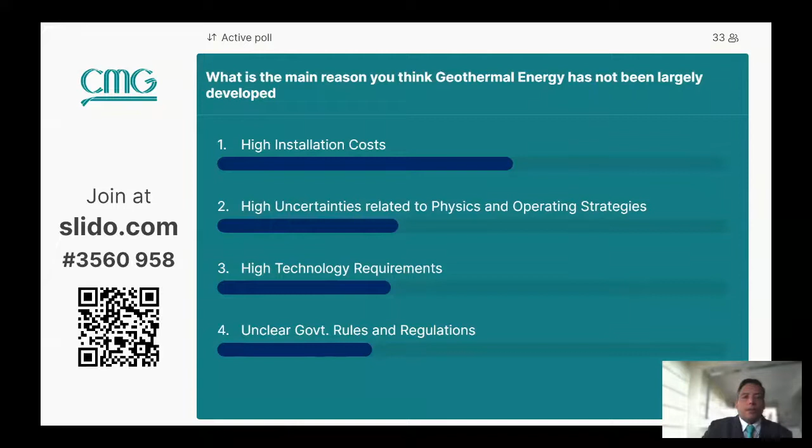Let's start this presentation by telling the story of a growing renewable energy industry. Energy consumption is by far the biggest source of human-caused greenhouse gas emissions, responsible for at least 76% of worldwide emissions. Within the energy sector, heat and electricity generation alone is responsible for at least 32% of these emissions. Carbon capture and storage has been largely implemented in many projects in the US, Europe, and Canada, but this process is about disposing of CO2 already in the atmosphere, and we need to stop producing CO2. For that, we need to further implement renewable energies to reduce dependence on fossil fuel.

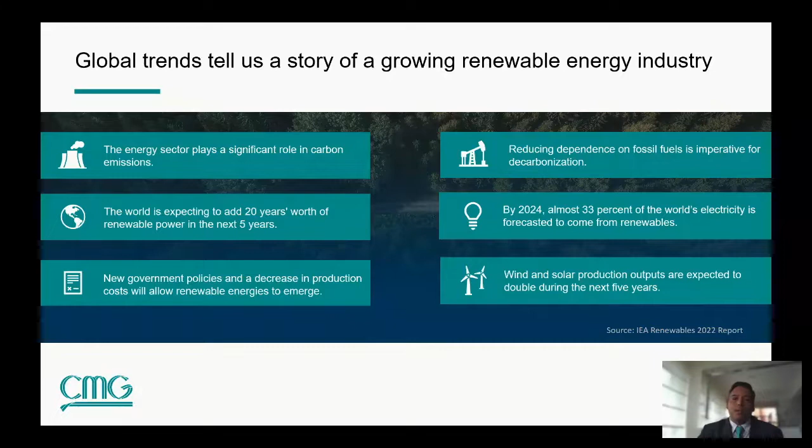The director of the International Energy Agency stated that the world is set to add much more renewable power in the next 5 years than it did in the last 20 years. Some experts even predict that by 2024, almost 33% of the world's electricity is forecast to come from renewable energies. Due to the pressure of decarbonization, governments seem to be changing policies, and this, added to the significant decrease in production costs, shows a clear driving force for renewable energies to emerge. An international agency report titled Renewables 2022 examined energy resources around the globe and found that wind and solar production outputs are expected to double during the next 5 years.

In 2022, geothermal added much lower power than expected from previous years. If you compare the amount of money invested in geothermal to other renewable energies, geothermal received around 10 billion US dollars, while solar and wind energy each received over 130 billion. So the question arises: why hasn't geothermal energy been developed?

Some experts compare geothermal nowadays with cell phones back in the 1990s. They were big, expensive, and only a few people could afford one. But things have changed, and we think this will be the case for geothermal energy as well. Each year, only in the US, geothermal electricity offsets the emission of around 4.1 million tons of CO2 in the atmosphere.

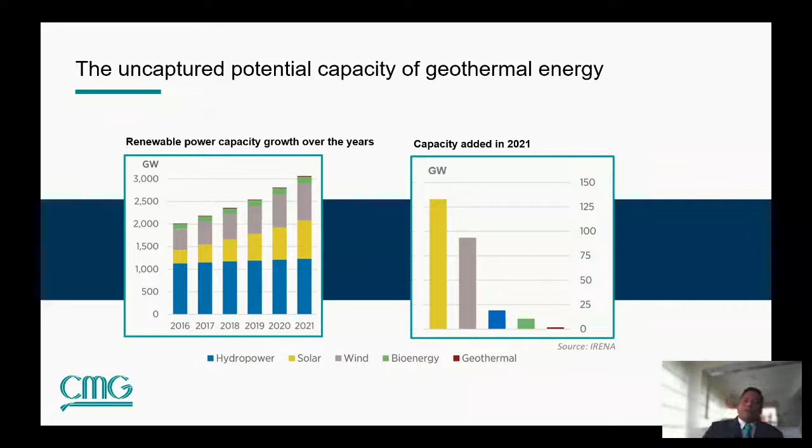So I think it's about time to talk about the agenda of today's webinar. We're going to start with an introduction to geothermal energy. Then we'll show you some specialized geothermal examples we've done in the last year. We'll show you how easy it is to create a basic geothermal case, and to end up, we'll talk about conclusions.

So let's start with what is geothermal. Geothermal is a type of renewable energy taken from the Earth's core. It comes from the heat generated during the original formation of the planet and the radioactive decay of materials. This thermal energy is naturally occurring and is infinite, as we say.

The mantle of rock is named magma, and in some spots the magma can come close to the surface near the crust. This typically happens near tectonic boundaries, which are the areas where most volcanoes and earthquakes are most likely to happen. We'll discuss this a bit further later on.

When the magma comes toward the crust, the rock and water absorb the heat, creating geothermal reservoirs. In some areas of the world, this heat can be produced, meaning it can be extracted from the rock and water.

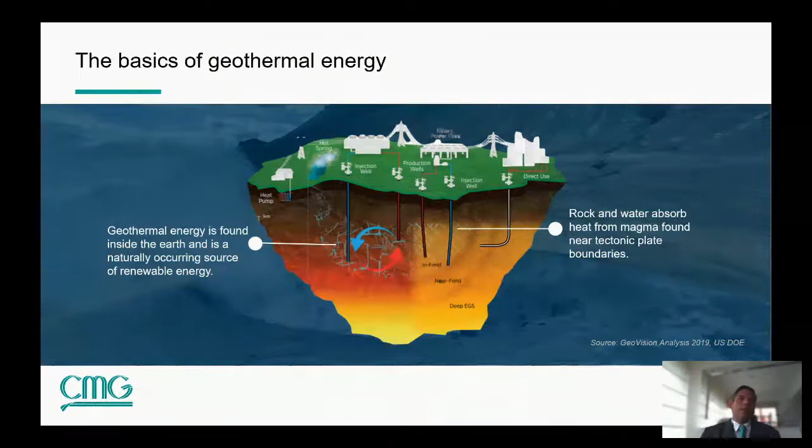Some studies ascertain that the energy present in the upper 10 kilometers of the Earth's crust is basically sufficient to provide global energy for approximately 200 million years. This is the energy needed for our entire civilization.

The technological advances of geothermal plants might take us to a point where we'll be able to put geothermal plants everywhere. But in this case, the Earth is in a constant state of change.

The Earth's crust consists of 15 to 20 tectonic plates, and the lines can be seen in this picture taken from the National Ocean Service. These plates can be thought of as pieces of cracked shell that rest in the hot molten rock, and they fit snugly against each other.

The heat from this radioactive process with the planet's interior causes these plates to move either closer together or apart, and this movement is called tectonic shift. With respect to locations, the limits of these plates, where magma can reach the surface, form the geothermal reservoirs, and most of these are found along the boundaries.

It's evident that the locations of plants and development of plants goes along with the locations of these areas. Some organizations, like ThinkGeoEnergy, have accounted for the number of plants, and they said there are around 500 plants installed all around the world.

In the coming years, I think this picture is going to change, and we're going to be seeing more of these plants located not necessarily along these lines. We'll talk a little more about that in the coming talk.

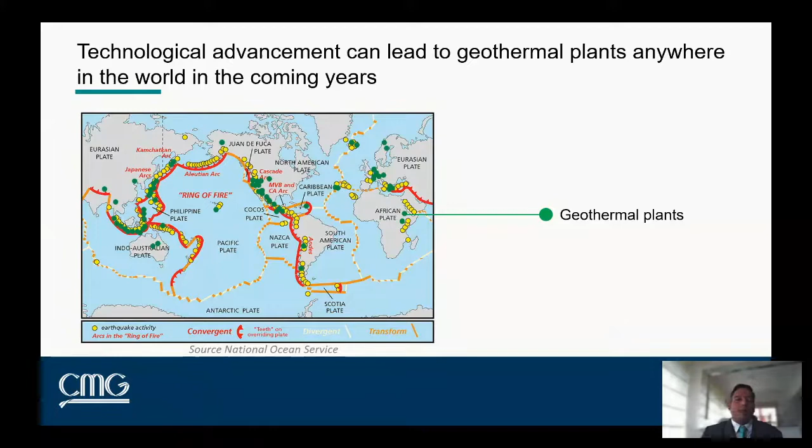Okay, so let's continue with the advantages and challenges related to geothermal energy. The first, as you said in the poll, is high potential. The worldwide energy consumption is around 15 terawatts, which is far from the total potential energy available in the source. The current geothermal installed capacity is around 16 gigawatts, more or less, which represents just 5% of the potential, calculated to be 320 gigawatts.

There is hope that the number of exploitable geothermal resources will increase with ongoing research and development in the industry. Just in the US, the Department of Energy ascertains that the potential for generating energy out of EGS systems is 100 gigawatts. That means 25 times larger than current EGS production, and it might power around 100 million American homes. It is sustainable and stable.

Geothermal provides a reliable source of energy compared to other renewable energies. This is because the resource is always on, 24 hours a day, 7 days a week, 365 days a year. It doesn't depend on conditions like wind and solar. It is reliable. Energy generated from this source is easy to calculate and does not fluctuate at all. This means we can predict the power output from a geothermal plant with a high degree of accuracy.

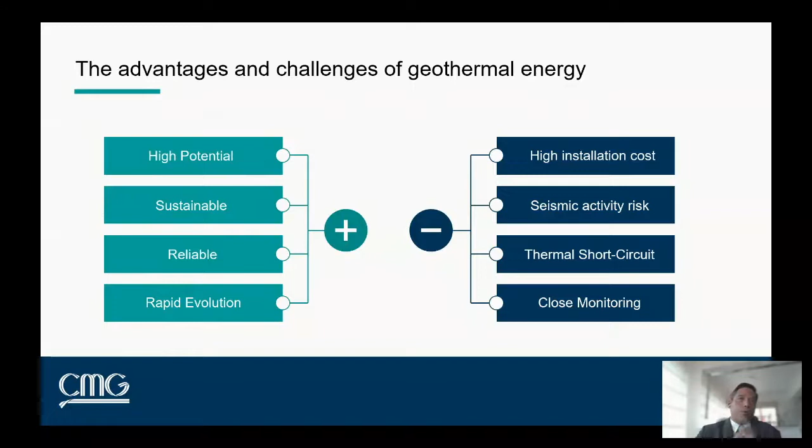Lastly, like O&G reservoirs, geothermal needs specialized subsurface know-how to guarantee proper management and monitoring, to enhance optimum operational decisions, and to procure the long-term success of the project. So this plays an important challenge for this type of project.

Regarding the classification of geothermal resources, we can start with the conventional hydrothermal resource, which is similar to what we have in the oil and gas industry. You could have faulted rocks and permeables where we could inject or produce from. We have heat, water, and permeability present. We can produce hot water or steam, if it's the case. We can always mitigate the loss of potential in the plants by injecting some water to maintain pressure.

The second is enhanced geothermal systems, which are taking a lot of lead nowadays in the industry. The permeability is not high enough in this reservoir, so there is hot, dry rock with no permeability. Because of that, you need to create hydraulic fractures, inject fluid, and produce fluid back to extract the heat. EGS systems have a higher uncertainty, as we have to make sure there is enough conductivity between the injector and the producer for the water to travel from one point to another. We need to be sure the exposure time of this water is big enough to heat up and be produced. The third category of the system is closed systems.

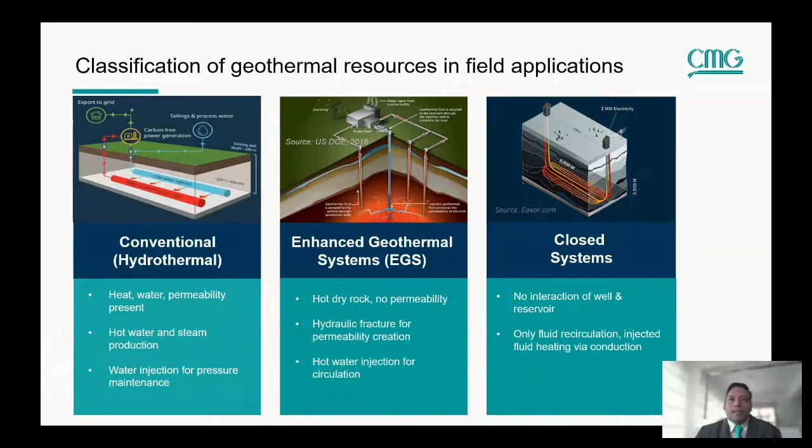Essentially, in this case, the system is closed and it consists in recirculating the fluid. It doesn't have to be water, it could be any kind of fluid. And then it takes the heat out of the reservoir just by conduction. This type of closed loop technology can take advantage of the existing oil and gas infrastructure and rigs and completion rigs in order to develop these multilateral wells that are part of these huge heat interchangers on the surface. It can be located everywhere, it doesn't need to be located necessarily in hot areas, and it still can generate a lot of energy in order to generate power.

So let's talk about the risk factors associated with geothermal energy. There are many uncertainties related to the implementation of this renewable energy, and they are not necessarily related to technological risk. Political risk plays an important role as it's unpredictable, and priorities might shift depending on the policies and regulations. The regulatory risk - we might have some insufficient and contradictory policies in some places, weak legal frameworks to apply this type of project.

However, with the current benefits toward CO2 reductions in some countries, it has triggered changes in regulation. As an example, the U.S. Department of Energy said that it intends to make geothermal enhanced systems a widespread renewable energy option in the U.S. They even launched last year a geothermal power earthshot, which intends to cut costs in the geothermal energy system by 90% by 2035. More recently, a couple of weeks ago, they are seeking the application of a fund of around $74 million in order to help pilot projects that can help the advances and commercialization of geothermal technology.

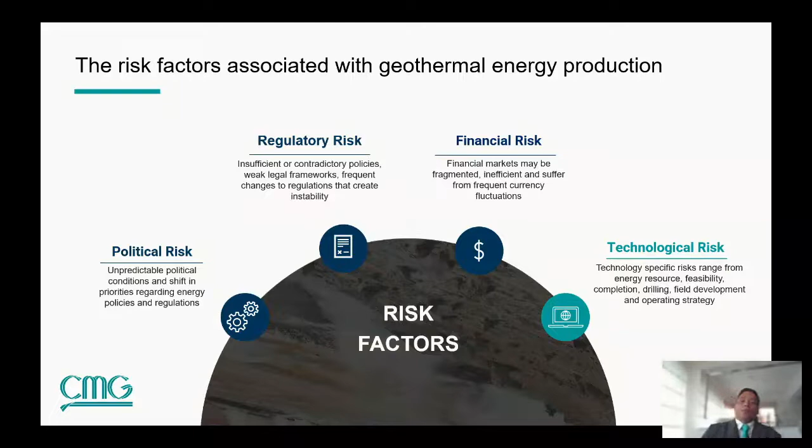Let's talk a little bit about the physics. Physics of geothermal have many sides, and companies should have the technology that can provide solutions to represent each of these phenomena. Fluid flow - most of the fluid flow in geothermal reservoirs occurs in natural fractures present in the formation, and sometimes in matrices related to impermeabilities related to the matrix, and we need to account for the flow and the correct representation between fractures and matrix in order to accurately represent the physics of the process.

Heat transfer - conduction, convection, dispersion, counter flow. Whether the geothermal system is natural or man-made, heat transfer is the most important phenomenon, and it will be critical to evaluate the amount of energy that can be obtained from the source and the production strategy optimum to take the best advantage of the resource. Regarding heat and pressure losses, wellbore temperature and pressure calculations are critical to estimate the correct and optimum conditions that should exist in order to guarantee the minimum losses of energy when producing the water from the reservoir up to the surface.

Geomechanics - really important, as you see we can present some changes in the rock, like causing some subsidence or activation of faults. So we need to guarantee that when we apply our projects, we are not going to be causing any damage into any closed formation that might trigger some troubles in the future.

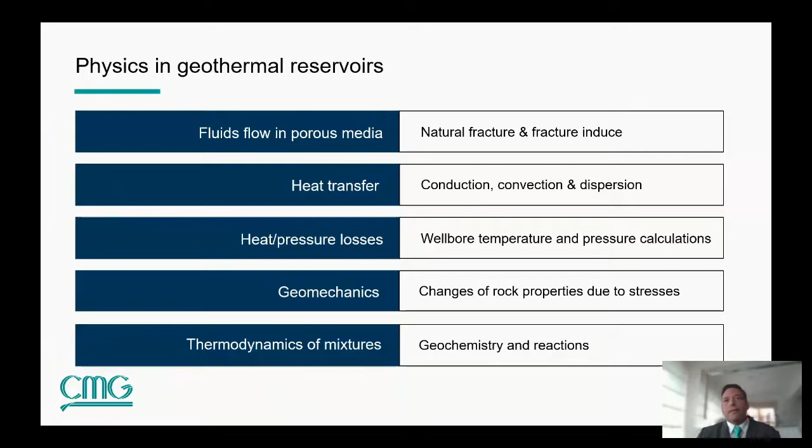Regarding thermodynamics of mixtures, it is really important to represent the water properties such as viscosity and density, and how these change when they pass through different phases, from supercritical conditions to liquid, due to changes in temperature and pressure. Also, water chemistry plays an important role. It's being used a lot to find out the origins of the water, and also to account for any reactions that might occur in the subsurface that can cause deposition or precipitation of solids that might affect the production equipment.

Let's come now and talk about the risking of the geothermal projects. Drilling costs, as I said, are around 30 to 50% of the total development costs, and it might vary up to 25% in some cases.

This is why it's so important to account for uncertainties present in the reservoir to evaluate not only the number of wells, location, fracture, if there are any, and also the possible operation conditions that might yield the optimal advantage of the resource. If drilling is successful, then the reservoir must be tested to determine the magnitude and productivity and to understand the longevity.

This will help us generate the power plant's design and to know what type of plant we are going to be installing. Also, we need to be really aware of the type of fluids we are dealing with, because hot temperature, abrasive rocks, and corrosive environments located on the ground come with significant unknowns.

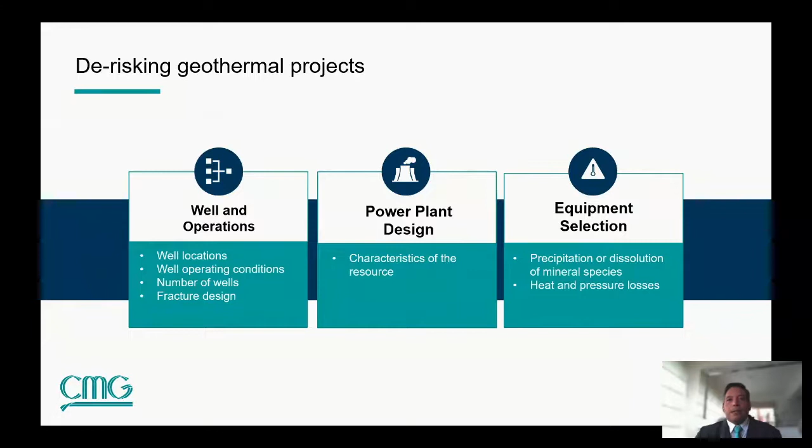We need to account for these uncertainties in order to select the right equipment and the selection of the tubing and production materials, in order to take advantage of the heat and allow for less pressure losses in the system.

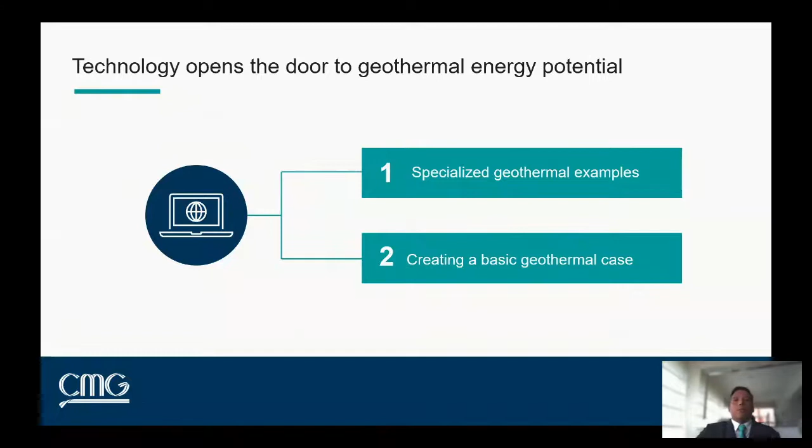So now that we have talked about the introduction of what geothermal energy is, let's go directly into business, and let me show you some specialized geothermal examples that we have prepared for you. Let me come out of this for a moment, and let's set ourselves directly into this presentation.

So we're going to go and see the results that we have performed in our software. We are going to use results graphs in order to show you some of these examples. The first example is related to a standard geothermal system.

This is the typical system where we drill producing wells to get hot water or steam out of the formation. Of course, there is a lot of uncertainty in the size of the formation initially, and we need to account for them to be certain that we are not going to get into a thermal short circuit.

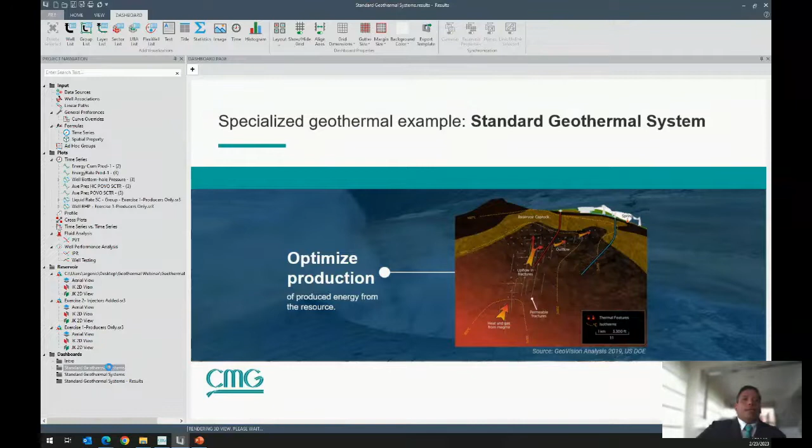So in this sense, we not only take into consideration the locations of the wells for the production of this water, but also the optimum configuration and completion, in order to allow the lesser heat losses from the bottom of the perforations to the wellhead of the wells.

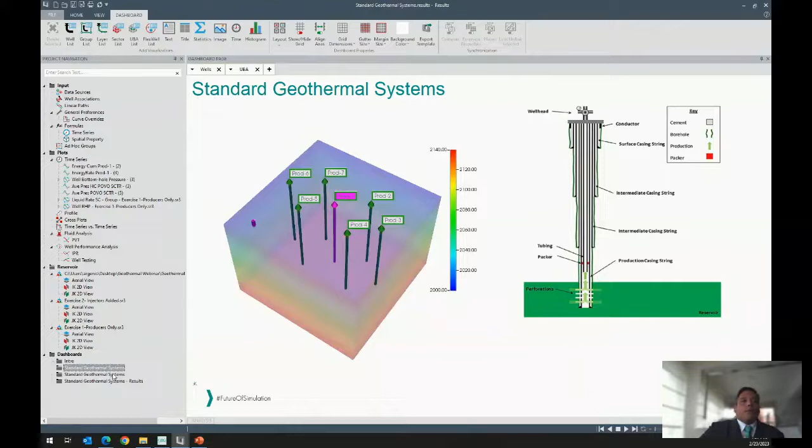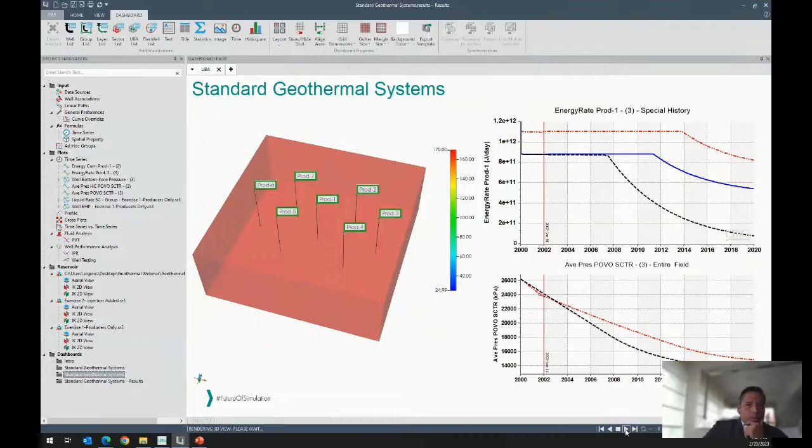Also, we need to account for the uncertainties in the size of the source, in order to evaluate the possibility of the impact of just producing the wells as they are, where we can have an amount of energy generated, or what happens if we add some injectors into the system at some point, and then enhance perhaps the amount of energy that can be taken out of the project.

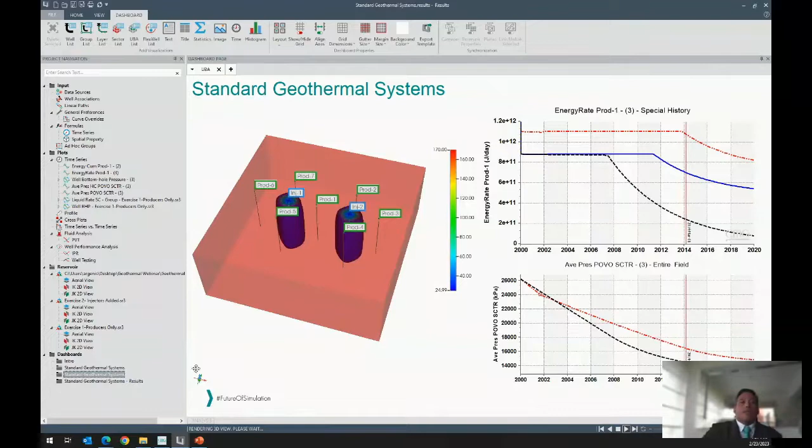Even when we optimize the type of completions and the spacing and the rates of the wells, we can increase the energy produced out of one of these wells by 25%, which means a lot in terms of having a long-term project success.

The second case we are going to be showing is related to the enhanced geothermal systems. As we said, enhanced geothermal systems consist of adding some fractures in the reservoir in order to enhance communication between producer and injector.

But there is a lot of uncertainty in how these fractures go, because we don't necessarily know the stress distribution of these formations. And we need to account for these uncertainties in where we are going to be locating this well, what rates we are going to be using, and what happens with these fractures when we start changing the stresses of the formation.

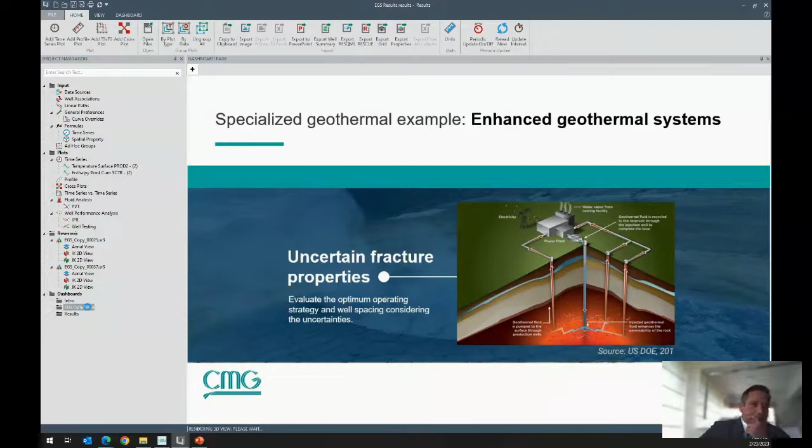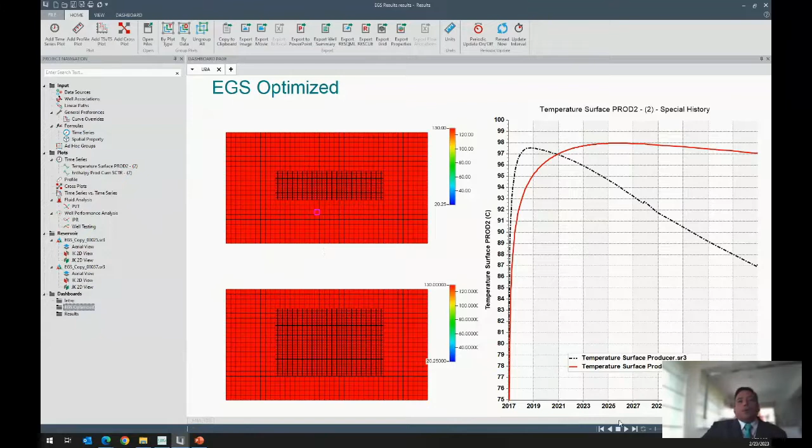So we came up with this case study where we evaluate the representation of the fractures using our methodology of a tartan grid, and we were able to calculate or estimate the optimum well spacing between the production well and the injector, in order to avoid water going directly along the plane of the fractures from the injector into the producer, which would not allow proper heat exchange between the injected water and the heat of the formation.

We came up with an optimum well spacing in order to guarantee that we are not going to be producing cold water into our systems, and also to account for the uncertainties present in the fracture system. With this, we were able to increase the energy, or the temperature at the wellhead of the producer, by around 15%. So this is a game changer in the project.

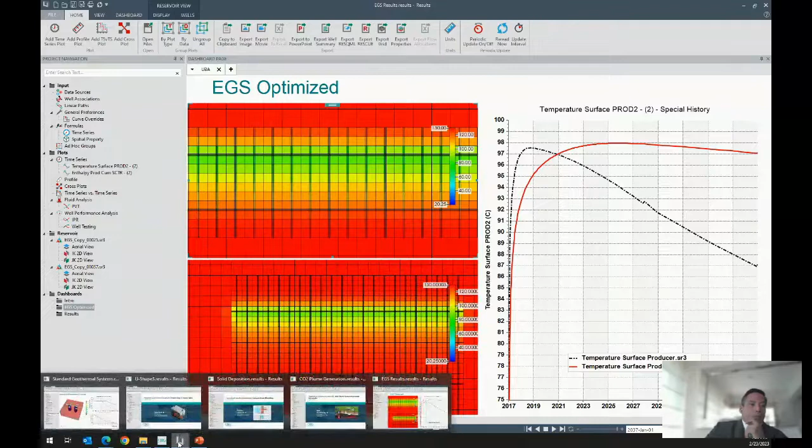The other case we would like to present is the closed loop U-shaped wells. These consist of connections of two vertical wells with many horizontal multilateral wellbores, creating a closed sealed radiator-like system.

The working fluid could be selected and added at the surface. It doesn't have to be water, and then it's circulated to harvest the heat.

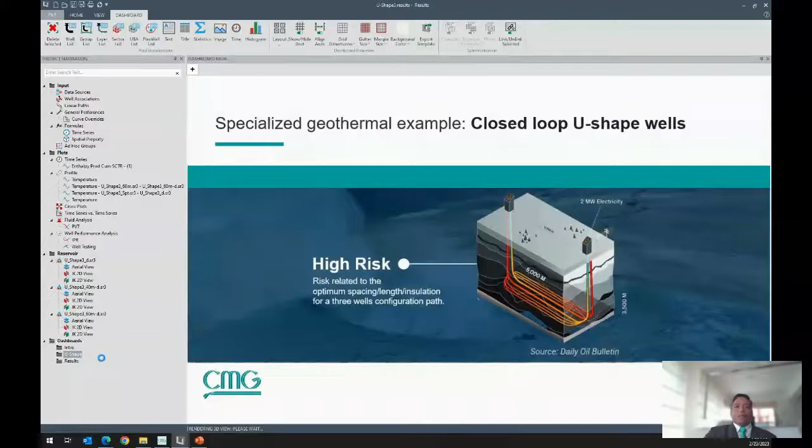But then the question comes in: what is the separation of these multilaterals, and what is the optimal length of them? For that, we use our tools to optimize the distance of separation between these U-wells to account for the best use of the energy under the ground.

We see that when we have a 20-meter separation, initially it doesn't affect too much the temperature seen at the wellhead of the wells. But as the fluids and the conduction of heat comes from the formation to the fluid, we end up cooling the formation and affecting the performance of the system.

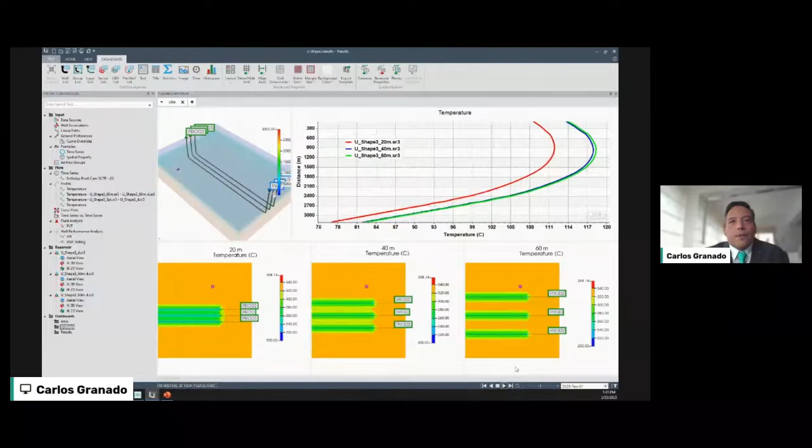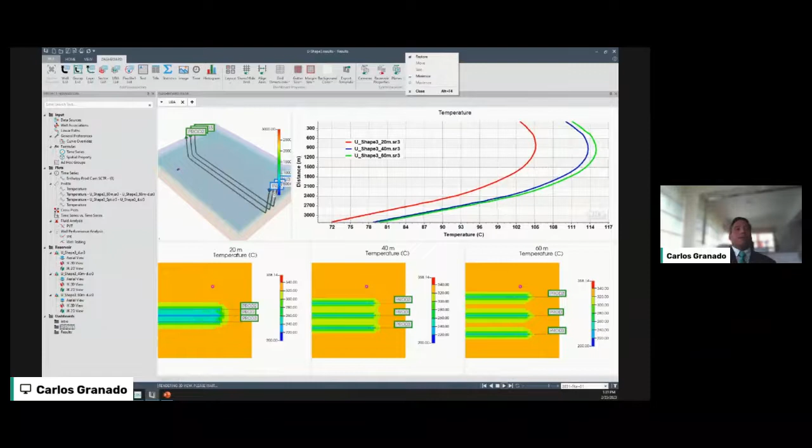We found out that in order to keep us safe and produce the largest temperature in the wellheads of the wells, we need to have the wells at least 60 meters separated from each other. This guarantees that we are going to get around 15% more temperature than originally. So this is interesting for us right now.

The second case is related to the formation of scales. Carbon dioxide is present in important quantities in geothermal fluids, and when pressure drops, the chemical equilibrium of the brine changes with some of the CO2. Because of this, it can generate supersaturated calcites, which start depositing in the wells, not only in the wellbore but also in the reservoir, affecting the fluid flow in the system.

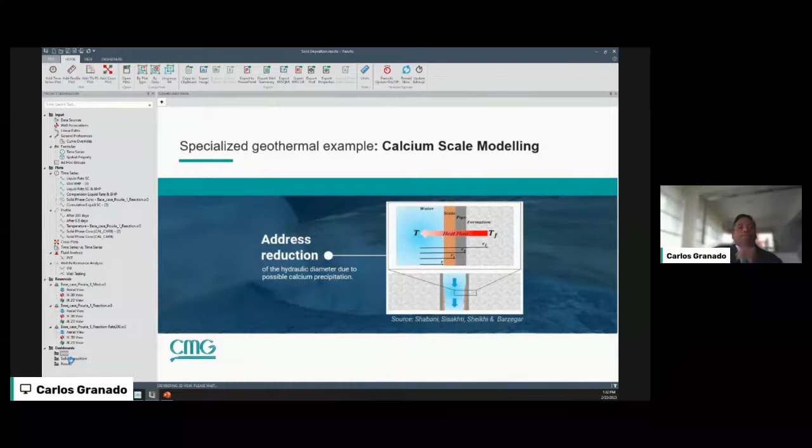If you compare the case where we didn't model any type of precipitation to when we model the precipitation using the experiment, the rates are drastically reduced because of the reduction of the hydraulic diameter, the equivalent diameter, due to the solid deposition.

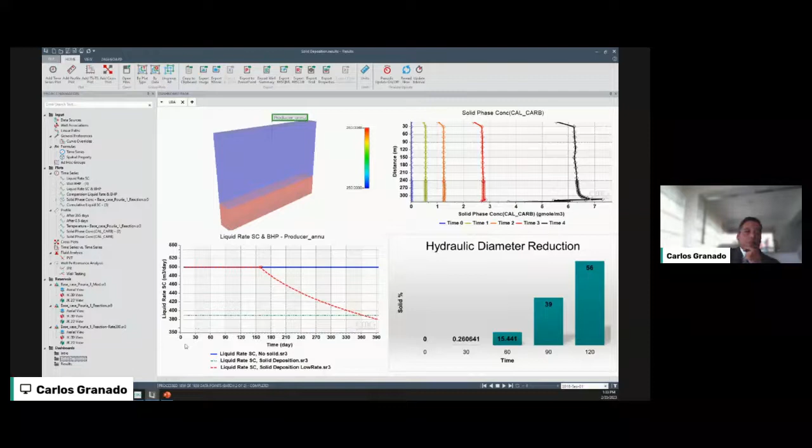When we use our optimization tool to find the optimum operating strategy, we found out that just by reducing the rate of production, we were able to avoid the formation of these solids in the tubings, which is a really interesting case to share.

Let's talk about this last case study. We are showing CO2 plume generation inside the aquifer. This is a promising technology that combines geothermal energy while at the same time enabling carbon capture and storage, to safely remove some CO2 and capture it in the subsurface.

We use CO2 as a subsurface working fluid to extract the energy. This has several advantages over using traditional water and brine, as it has much lower kinematic viscosity than water or brine, and the mass flow through the reservoir is higher than when using water and brine.

The initial stage of this is called the CO2 plume generation. During the first stage, CO2 is injected into the reservoir, displacing the brines and developing a CO2 plume. This stage is crucial since we need a sufficient amount of CO2 in the reservoir to minimize water upconing in the producing wells.

During this stage, the production wells are shut, and we are just injecting CO2 at a fixed rate, which usually coincides with the production rate when we start the geothermal process. For this case, we consider the plume generation stage to be achieved when the production well regions have reached a pore volume space saturated with at least 55% CO2.

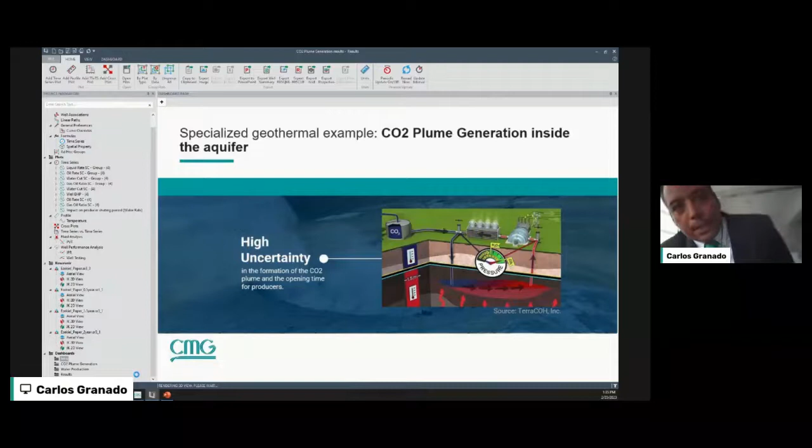This is highly dependent on the formation properties like permeability, porosity, and the diameter of the production well. So we use our artificial intelligence tool in order to find out the optimum rate to generate this plume.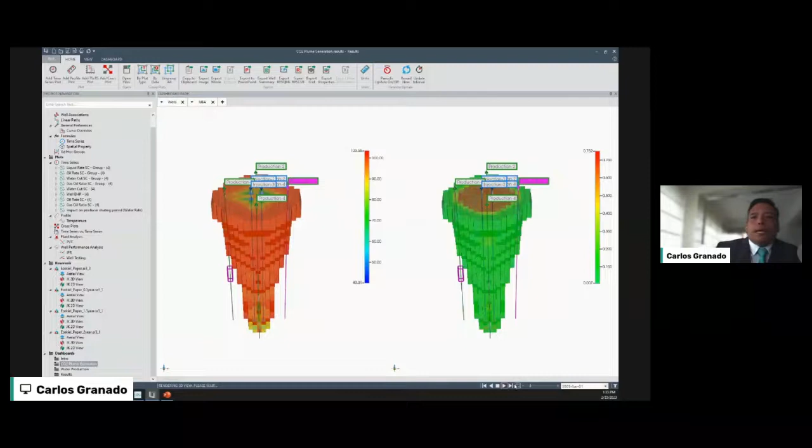As you can see in the picture, this is the location of the injector wells. On the left side we are showing temperature, and on the other side we are showing saturation. We see that we managed to get a saturation of around 50 to 55% around the well, which is good enough to guarantee the formation of the plume and the displacement of the water out of the producer.

So we also performed some sensitivities by selecting the shut-in time, and we saw that after 2 years we kind of guarantee that the water was not in the wells anymore, and the production of water is less, while the CO2 is around 94% or 95% of the total production of the wells.

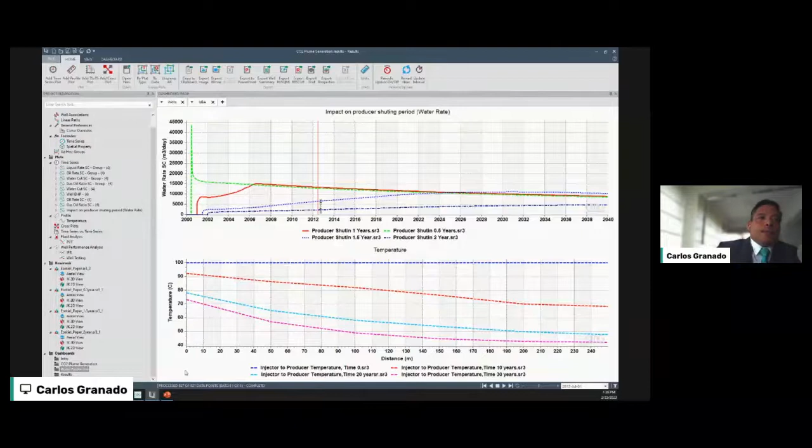Also, we can see that we still can get some interesting temperature in the producers after many years, which is good enough to get a lot of energy out of the CO2. This was a really interesting project to show you, and I hope you find it interesting too.

So let's carry on with the generation of a simple geothermal case. I am going to show you that you don't need to be an expert, a petroleum engineer or a geothermal engineer in order to generate a simple geothermal case. You just need to do some clicks and then you have your initial geothermal model generated.

Of course, you can always account for the uncertainties present, but let's just go into this and open a new case. We open Builder, which is our preprocessor, and we select that we are going to be using STARS, which is our thermal simulator. We select a date, and we click OK.

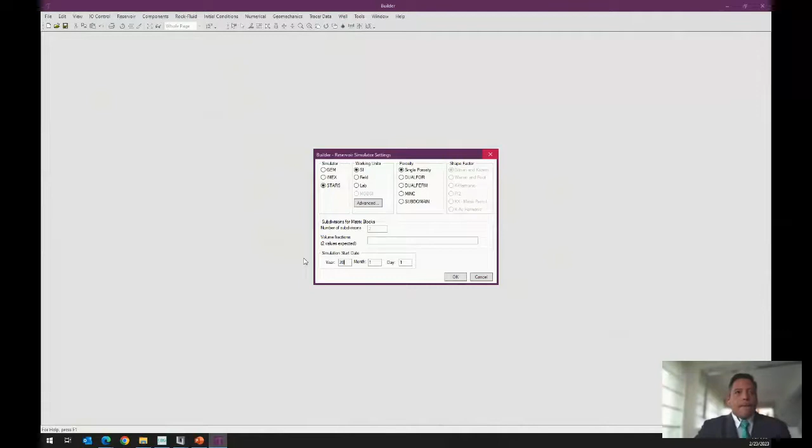Right here our model is empty, and we don't have a reservoir, a well, or anything, but this is easily fixed by using our process wizard. The process wizard has been largely used in other areas like enhanced oil recovery, but in this case we are going to select the geothermal model.

The geothermal model gives you some introduction of what geothermal is, based on what we already talked about. Then we can select from the options of geothermal well: a closed loop geothermal well with injection and production from the same well through tubing and casing, or a closed geothermal U-shaped well.

Let's take the simplest case to show you how you can generate your geothermal model. This is easy. Now you can see here your geothermal reservoir properties: thickness, lateral size, properties like permeability, porosity, the temperature, the pressure.

So let's start generating a case where we have the grid up to the top of the surface, so we can account for the losses of the geothermal source from the ground up to the surface. We can set a really low permeability to start with. We can add a depth of reference of around 2,500 meters.

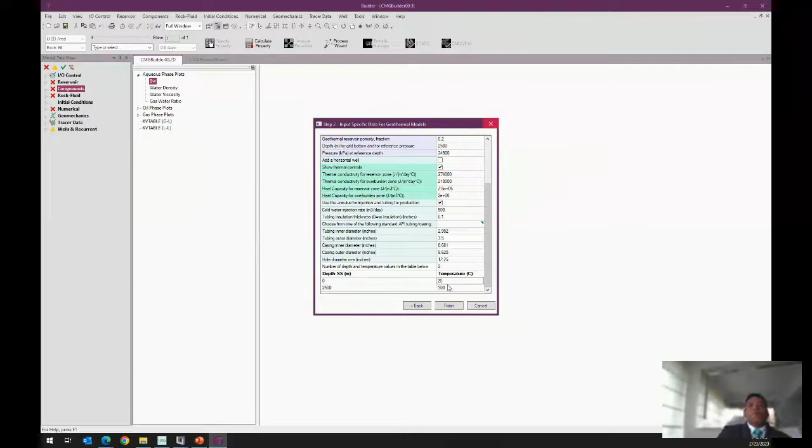Let's select a tubing of 3.5 inch casing, and let's change the reservoir temperature from 15 to 25. Now our model is pretty much set to be run. We finish.

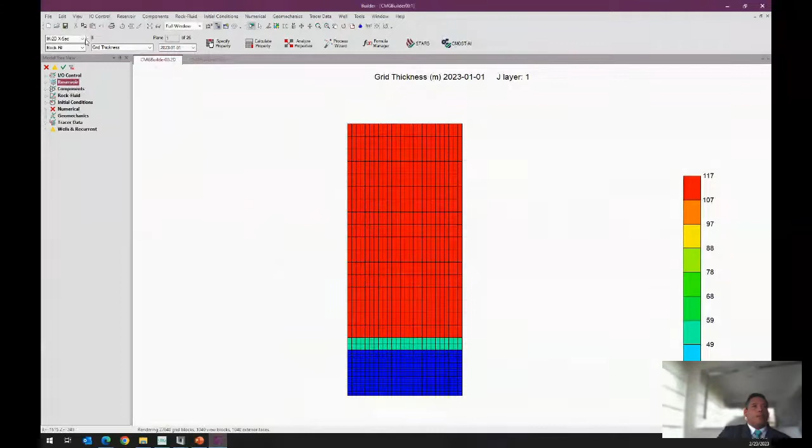And there it is, we have our model built. We can go and have a 3D view of it. We can go into properties and delete the grid and create some transparency, and you can see your reservoir and your well. You can have a look at the well configuration by clicking here and see.

Give me a second. Configuration. And we can actually set our simulation to run by clicking some numerical control. Sorry, I'm having issues with my mouse here.

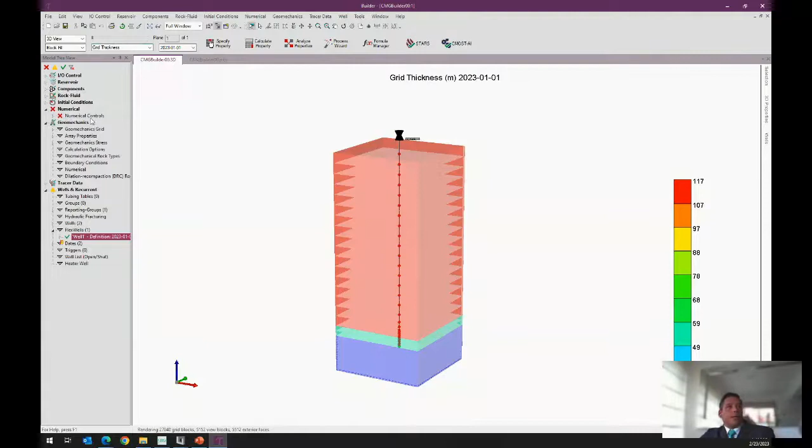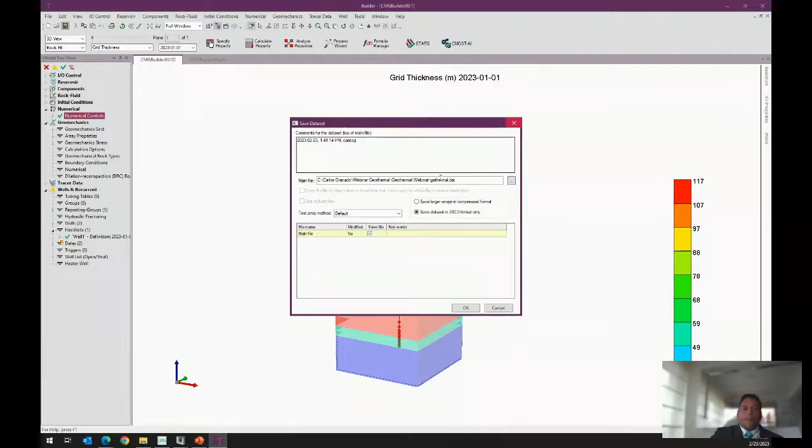We can select auto tune in order to tune the artificial intelligence to run our software. So we are set, we save, we click a name for the model. We click OK, and that's it.

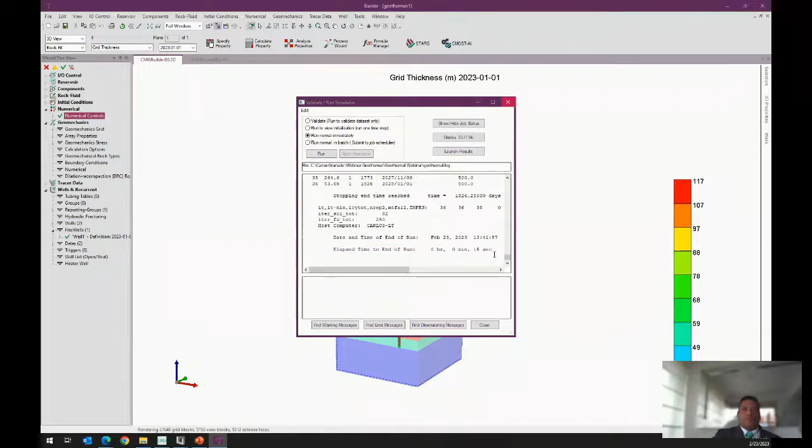We're set, we run the model. That is going to take, I don't know, some seconds - it's a 5-year model. So this is it, it's done. It ran in 15 seconds. So let's go and have a look at the results.

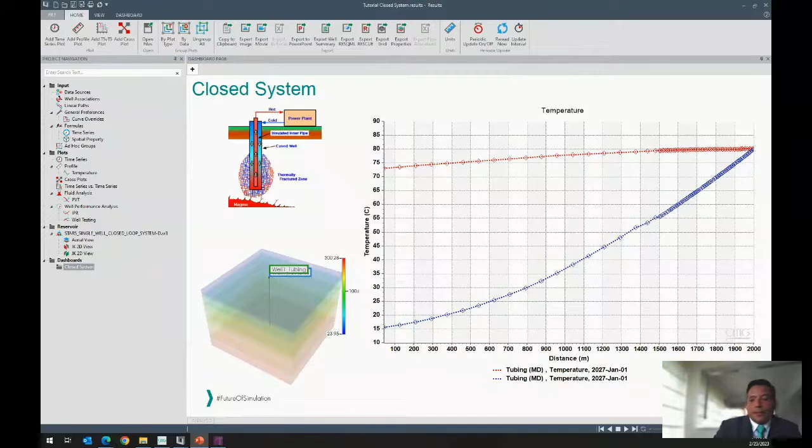Let's jump then directly into the conclusions. Geothermal plays a key role in decarbonization to reach zero emissions targets. Geothermal is a reliable source of energy, with new projects coming all over the world. New technologies are improving the overall cost effectiveness of geothermal energy, and geothermal simulation can optimize projects to increase their long-term value. Thank you very much for your attention.